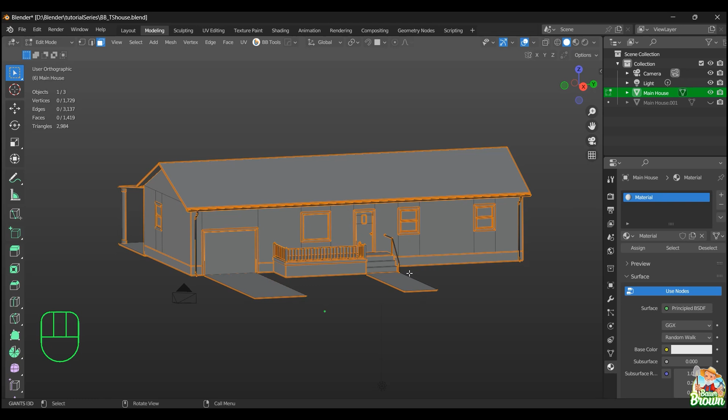When we start out here, we have one material. It's a very basic material, and it's a coverall. If we highlight the material and press select, you can see that the material encompasses the entire model, so every face has that material.

Now, what I like to do in the beginning is pick whichever material I think is going to be the biggest pain in the butt to work with. Maybe it's the siding or the roof, whichever has the most parts to it and seems like it's going to be the biggest pain to select every single part. That's what I will rename this base material to. In this case, I'm going to mark that as siding. This way, I don't have to reselect all of these pieces.

So I'll just start designating other faces to other materials, I'll show you what I mean. If I was to hit select now, it still shows every single piece. But what I'm going to do is click the plus sign for a new material, click new, and we'll name the next one roof. Now I'm not going to give any of these materials textures quite yet, I'm going to come back and do that when I'm done. But again, that's one of those things you can give it a texture right now if you want to, you don't have to wait. It's just the way that I do things.

Also, you can see that my siding came up as siding.001 and roof.001. That's because this is the second time I'm shooting this video, unfortunately. Same thing happened with the last video, it was delayed by several days, quite a while actually, because I shot the video like 3 different times for various reasons. Same thing this time, I had to reshoot for various reasons. Anyhow, that's neither here nor there.

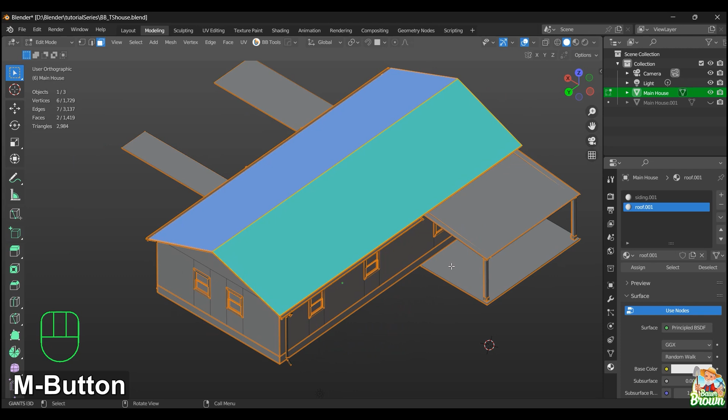So with this roof, what I'm going to do is just select the pieces of my roof that I want to have a certain material. Like this part of the roof here, I may want to have something like an asphalt shingle. But this roof over here I might want differently, so I'm going to select and highlight this roof and assign that. Now this roof over here, we'll start a new material, and I'm going to call that one porch roof because I'm going to do something a little bit different with that one. Maybe I'll give it like a corrugated steel or something, so it's not going to match what's going on with this roof, which is fine.

Now, with the way that I do my materials, I try to keep them to a minimum. There's 2 different ways we could be doing this. We could be using the base game textures and their texture atlases, in which case every one of these materials will be exported with the model, and when it ends up inside of Giants Editor, you'll be able to see every one of these materials. But since I'm putting this model into Substance Painter, I'm going to be deleting every one of these materials once I'm done. I know it seems very counterproductive, but it's just my process, the way that I do things.

The way that I do things is not the way to do them, I just want to get that out there. There's many different ways to get things done, and people do things different ways. This is just my workflow. It's not necessarily the wrong way or the right way, it's just my way.

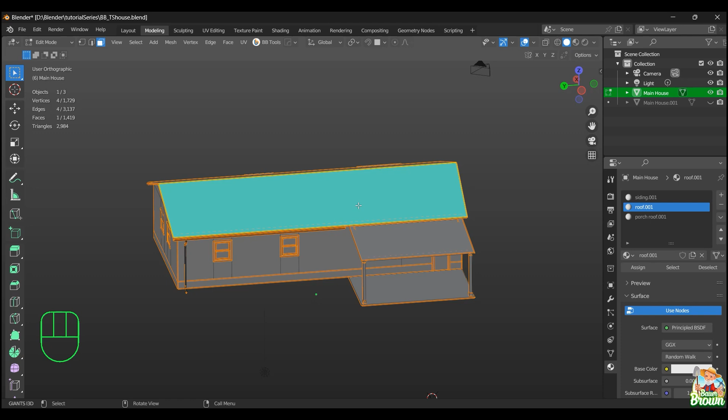I'm just not very good at it, so I hate messing around with it. So it just makes it easier for me if I try to keep everything within the 20 colors. Not a big deal if I go over, not a big deal if you go over either.

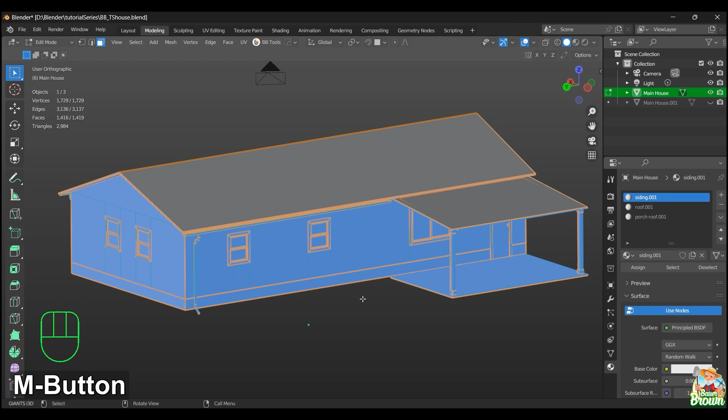So you can see what I have here now. When I select siding, you can see that the roof is not highlighted, and neither is the porch roof, because I assigned those to different materials. So that's what I meant about taking the most — whether it's your biggest area or just the more complicated area — that's what I rename that main material to.

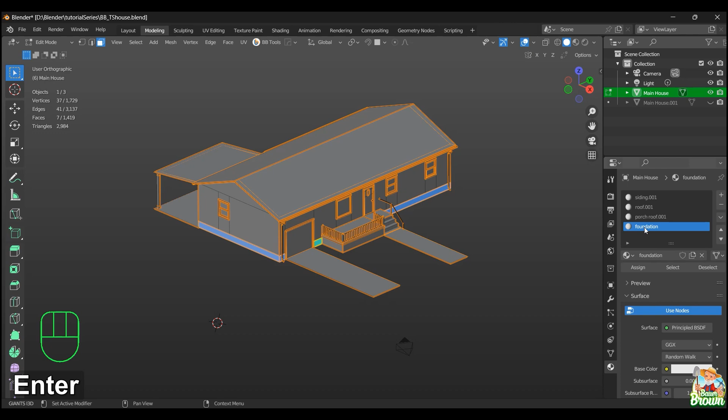And then from here you're just going to go to each one of these materials. Generally it's a material that you want to be a different texture. So if I know that this is going to be my foundation, I'll give that its own material. I'll start another one here and we'll call that one foundation, and then I'll assign that and just keep going right down the list.

So I'll go through the spouting, I know that's going to have a different material. Any of my trim work, that'll probably all be the same material. The insides of these windows here, like these pieces in here, that's going to be a different material. Doorknob will be a different material, the doors — so you get the idea, I don't need to explain all this to you.

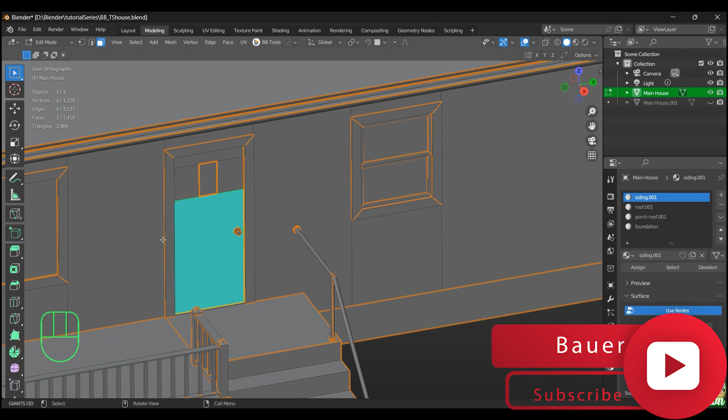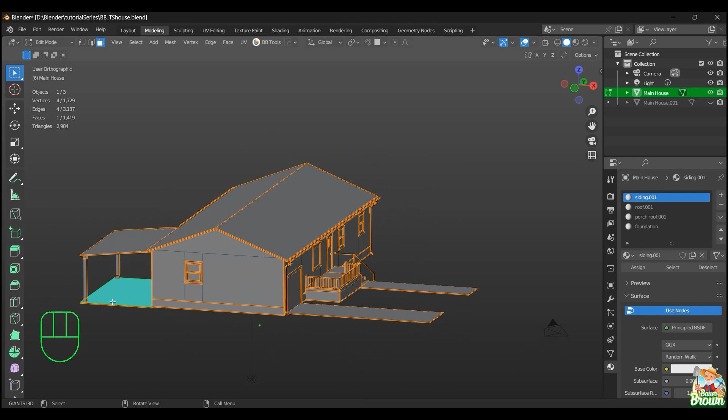Here and there, what you can do, and it's very helpful, is when we have things like the stairs, this walkway here, a driveway, a foundation, and a back patio — every one of those is going to be one type of concrete. Now it is helpful if you group them together, like maybe the stairs and the sidewalk is maybe the same material as this foundation, or the same as this back patio, so you don't have to have 4 or 5 different concretes going on.

But you can keep them separate if you want. If you have a vision in your head and a certain way that you think you want to do things, that's fine. But like I said, I try to keep it to a minimum if I can, but not a big deal if I don't.

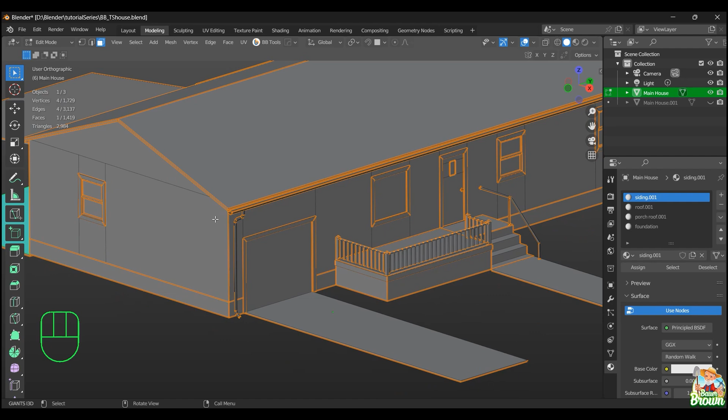So for the sake of trying to speed this video up and move things along, I'm not going to have you watch me go through every single one of these materials and assign them to a texture. What I'll do now is the next one I'll do, say, the trim work. But I will give you one pointer.

One of the ways that I find easiest when I assign these is if I go into X-ray mode. I find that much easier down the line in some instances, to be able to select my faces for these materials. But that's not the only way, that's just one way that I like to do it. There's also, you can press C on your keyboard.

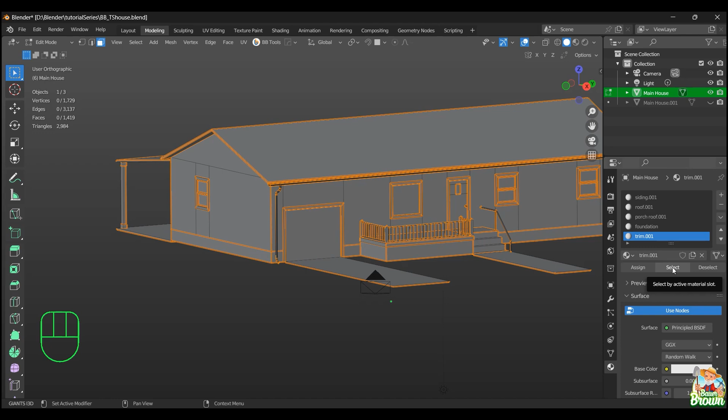Now, I think I just made the back patio part of my trim work. So when I hit trim and hit select, none of them are showing up. That garage should be showing up and it's not. No biggie, I'll redo that.

But anyhow, hitting C on your keyboard brings up that circle and you can start selecting things that way. This was all covered in my Blender tutorial series, like Blender for beginners, so you should be semi-familiar with the different ways you can pick faces.

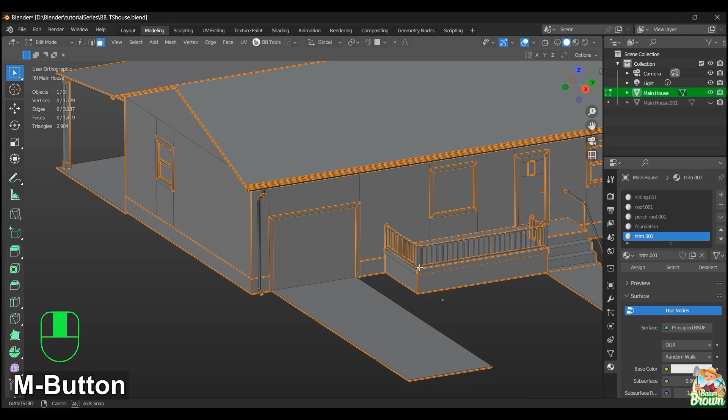So what I'm going to do is jump ahead and go through and make a different material for all of my different textures. I want you guys to do the same. Just for now, make the material and assign it to a face, don't worry about textures or anything like that. When I get back with you guys, I'll have all of my materials created and then we'll go through and create the texture that's going to go on here, and then we'll take it from there.

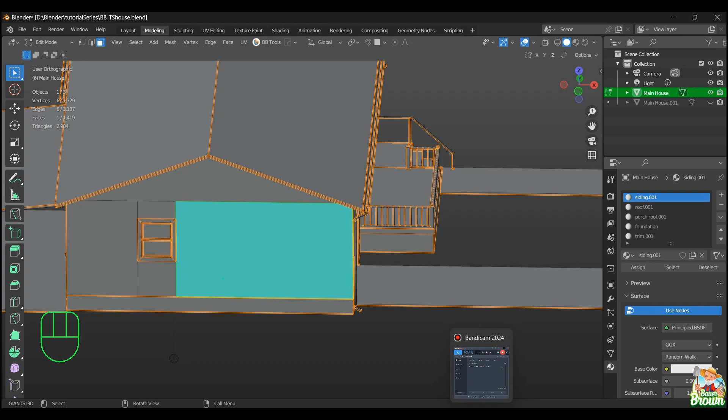Okay, so I'll see you guys in just a little bit, and by that time we should both have all of our materials created.

Two hours later. Alright, I am back and I finished my list, I have all of my materials created. How did you guys make out? You should have a list that looks something like what I have here, every one of my materials.

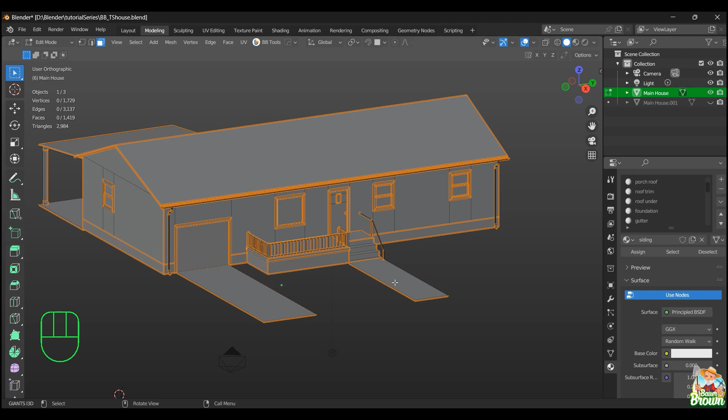Now, a good way to go about refining your materials - what I mean by that is we'll start with this top material here, the siding, because that encompassed everything.

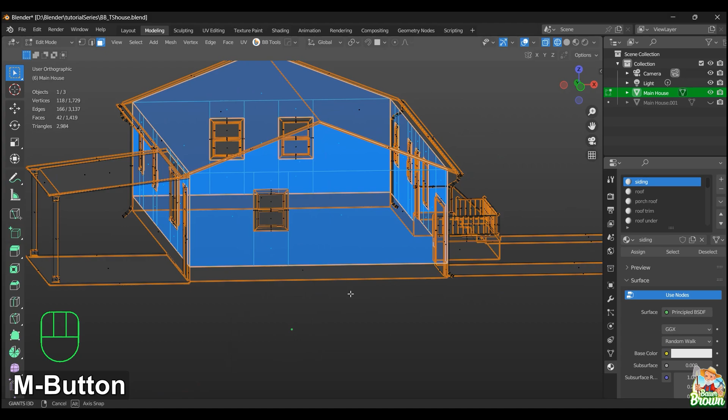What I'll do is go into wireframe mode, my X-ray mode - I just noticed I always call it X-ray mode, wireframe mode - and then hit select. So here you can see that just my siding is selected, which is what I want, but it's inevitable that you're going to miss pieces.

So maybe it's part of the window trim, maybe you'll see part of the foundation, doorknob, something - you're going to see something that highlights along with the siding, and you don't want that to be the siding. So that's the way to go through and spot the pieces that you missed that belong to something else.

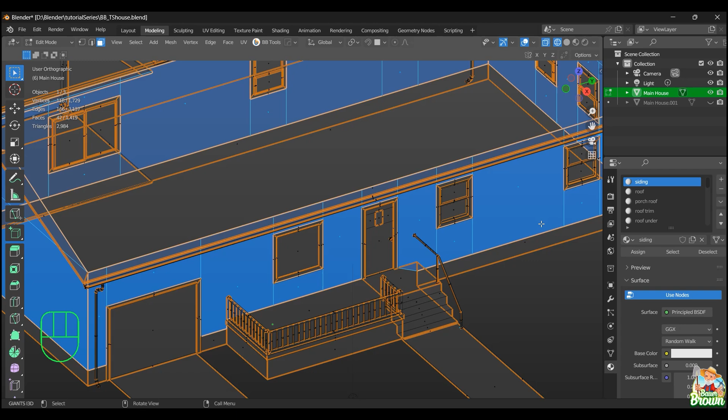So maybe part of the porch, part of the railing, rain spout, you get the idea. So that's the other benefit of using that main material that included everything, because this way, when you miss something, you'll be able to spot it very easily - your siding will highlight as well as all of the other pieces that you missed. It makes it easier to go back, spot those pieces, and assign them to the materials where they belong.

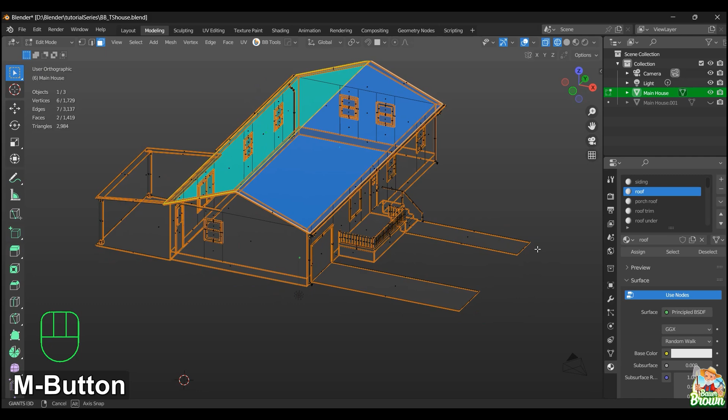From there, what I'll do is click off of it, click my next one, roof, and make sure just my roof is highlighted. I'll do this for each one of the textures, going down through every one of them.

We got the porch roof, okay. Roof trim is just the roof trim, no problems there. Roof under, which should be just the bottom sides of my roof - we'll select that, yep, and that is just the bottom sides. I'll do this for every one of them - foundation. So you guys should do the same.

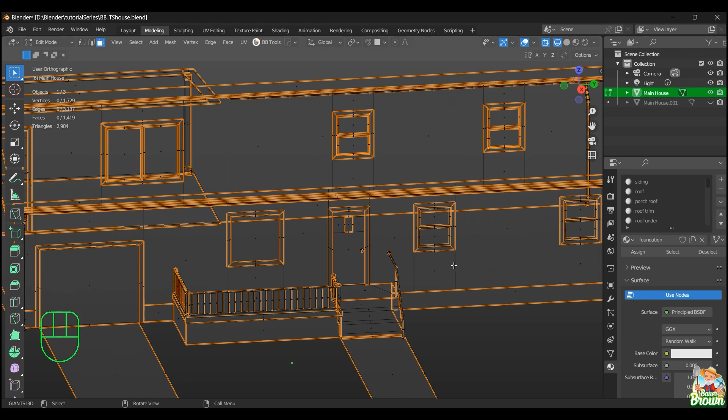Go through and make sure that you didn't miss anything, because it's not a big deal - it can be corrected in Instamat and Substance Painter without much of an issue. But it just makes life a lot easier on yourself when you get into Substance Painter and find out that maybe your rain spout has a brick texture. So it can be corrected, but it's easier to just avoid that and have everything nice and clean inside Blender before we even export it out to Substance Painter.

So from here, once you got that done, you got everything cleaned up, every face, every material is assigned to the right objects - so every material is assigned to the proper faces - we can go through and start giving these a texture. Now, like I said, they're going to get the same texture.

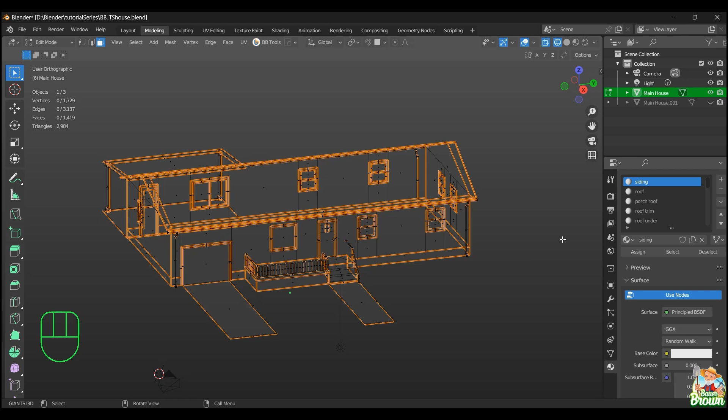So don't get too carried away here. What we'll do is go down to where it says base color. We're going to click on that, click image texture, and click new.

Now with new, I'll click up here on width, click, hold it in, drag it down, and hit 2048, because I'm going to use a 2K texture. If you did a different type of house, maybe something smaller like a shed, or something huge like a mansion, you might want to go smaller or larger with your texture depending on what you have in mind. But this house here is perfect for a 2K.

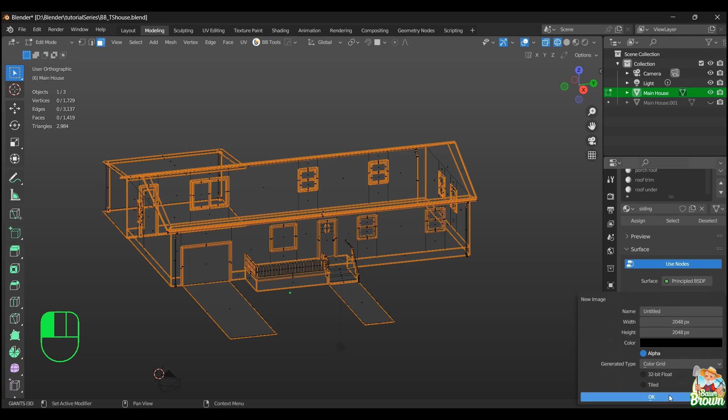So that's what I'm going to go with. And then for generated type here, I'm going to go with color grid - I'm sorry, not UV grid, UV grid is the black and white textures, the color grid is what I want. So I'm going to select that and hit OK.

So now that just assigns that to my roof - let me get this up here really quick - or to my siding, I'm sorry. So now when I go into material preview, you can see my siding is now that color grid. Now what I'll do for the next texture is go to the roof, hit base color, image texture.

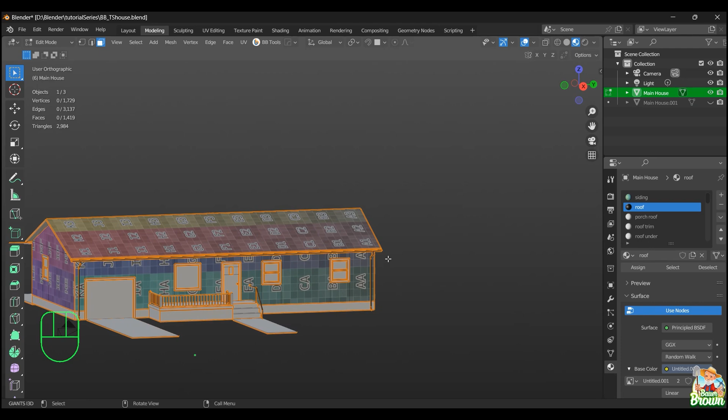Instead of repeating that process, I'm just going to go to this image here, drag that open, and pick untitled. So I'm basically giving it the exact same texture as the one before it. This is what I meant earlier when I said every one of these materials gets the same texture, all of them.

And what I'm going to do from here, once these are all assigned, is start realigning my UVs - my textures. I'll show you what I mean by that when we get there.

So if you're following along, what I want you to do now is just keep going through your list like I'm doing here. Go to image texture, untitled. It's really easy. I mean, it's repetitive, but it's easy. So you'll get a pretty good feel for what you need to do here.

Like I said, it's just a preference that I do it this way. There's no specific reason that I'm doing this at the end. This could be done as you go along. It's just the way that I end up doing it. Most of the time the reason for it is, as I'm working, it's different compared to when I'm working on my own than when I'm making a video.

So when I'm making a video, things are going slower. I'm explaining things, so it's a lot easier to just assign these things as I go. But when I'm working on my own, I'm cruising right along. Things are coming together pretty fast, much faster than when I was first learning.

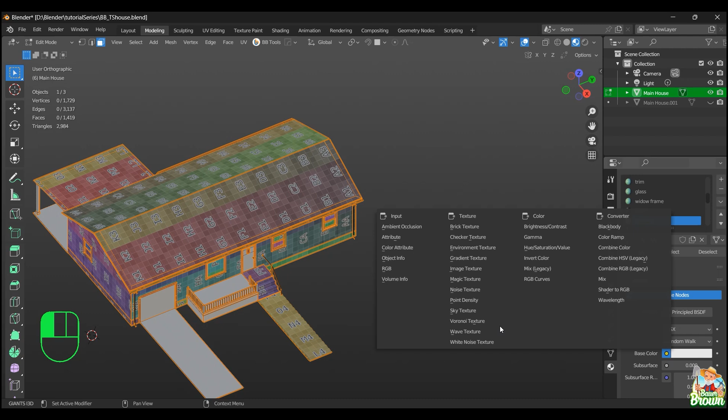But now things cruise right along, and it just slows me down having to stop, assign a texture to it, and keep moving along. I'd rather just wait until I got to the end and then cruise through the same way I'm doing now and just reassign everything to a texture.

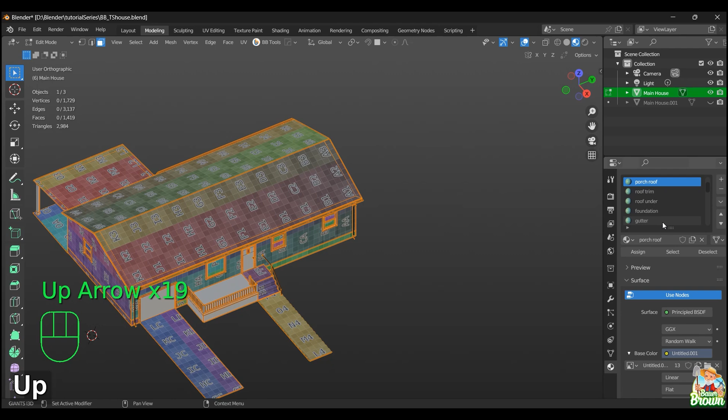Now I haven't counted my textures. I guess I can do that really quick and see what I came up with here. Let's see what we got. There's 1, 2, 3, 4, 5, 6, 7, 8, 9, 10, 11, 12, 13, 14, 15, 16, 17, 18, 19, 20, 21, 22. So I got 22 textures.

I went over the 20 that I initially had in mind. So what I can do now is either go back and combine two textures, or I'm just going to have to squeeze in two extra vertex colors, which is probably what I'll end up doing - I'll put an extra two colors in there. Not the end of the world, not difficult.

For some reason I'm just not good at vertex coloring. I tried getting into it using different applications, using just the Blender default, and yeah, I don't know. It's not complicated, I just wasn't really grasping it the way, maybe as quickly as I wanted to, or as well as I wanted to.

I found the add-on with TexTools ended up being really nice, it worked out well for me, so I stick with it because it works well with TexTools. Wait, is it TexTools? I got that wrong, didn't I? Let me check my UV here. Oh no, it is TexTools. Didn't sound right for some reason when I was saying it, I thought maybe I had it wrong.

All right, so let's go to railing here. I'll quickly finish these up and then show you what we're going to do next. The next step is going to take a little bit, not crazy complicated, but like everything else, it's monotonous and there's a bit to it. So we'll just finish adding these.

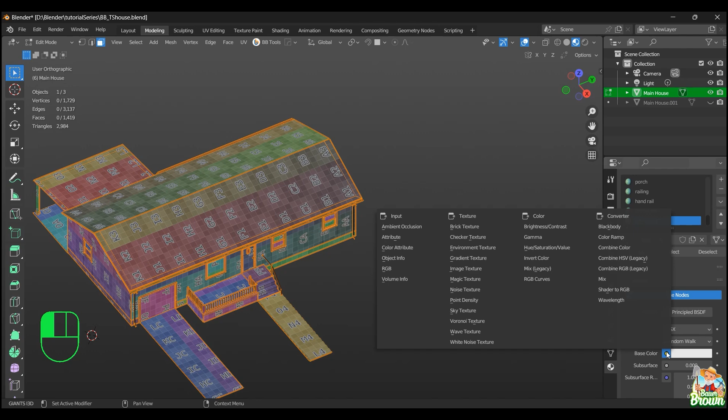All right, image texture, untitled, and then the last one. All right, image texture, untitled.

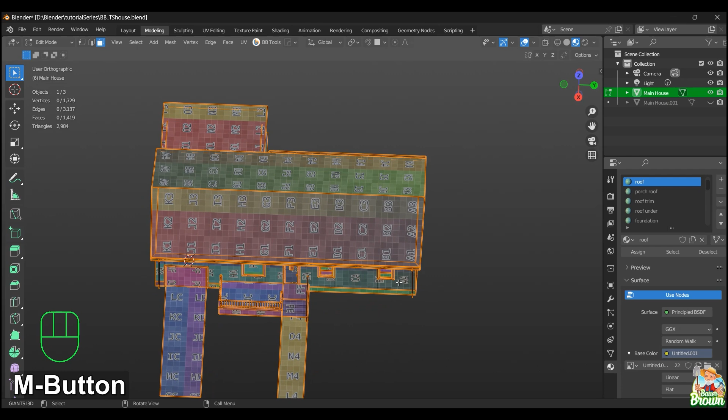Now the reason I use this color grid is you can see here how on my roof this one's kind of turned to the side, and I don't really want that. I want all of my textures oriented the same way. So when I put roof tiles or shingles on here, those shingles would go from side to side instead of top to bottom. Well, I don't want that, I want them to go from top to bottom.

So what I'll do is get into my UV editing space here. I'll make this a little bit smaller—really doesn't matter. I'm going to select this here, and hovering over top of my UV space, I'll get my keypad, hit R for rotate, and then -90.

You'll get used to like -90. If you're spinning to the right on this side, if you want to go like this one, I had to spin to the left. So if I go Control Z—oh no, I would want to spin to the right. To me, that would be 90 degrees, but if you look over here, it's actually -90 degrees. You'll get used to it after a while. So it's R -90.

So this way now, when my tiles show up, they're going to show up correctly. Again, this is one of those things that could be corrected inside of Substance Painter, but it's a real pain if you have to correct too many of these. One or two you missed isn't a big deal, but too many is a major pain.

All right, so this one needs to spin to the right, and that would be negative. So we'll hover over top of our UV space, R -90, and there we go. Okay, so those two are situated, and I'm going to do this for literally every one of them. Now with this in mind, with rotating everything, you're going to have a pretty fair idea of what your texture looks like. For the most part, it's not vitally important as long as all of your textures point in the same direction.

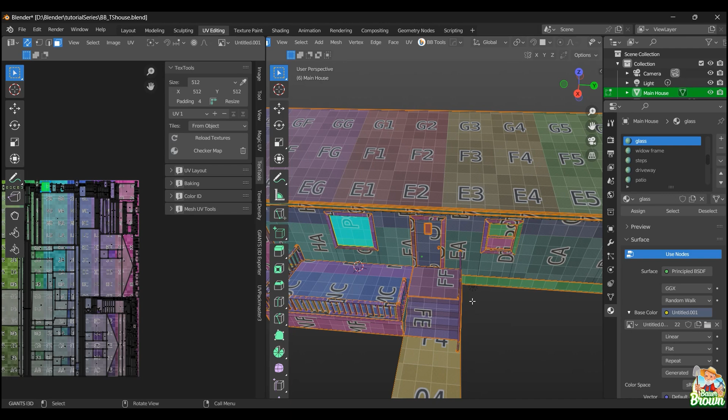The only thing I don't worry about is my glass, because there's no design or pattern to it, it's just a blackish or grayish color. So there's no shingles, no brick texture, no wood grain or anything like that, that's not going to look right.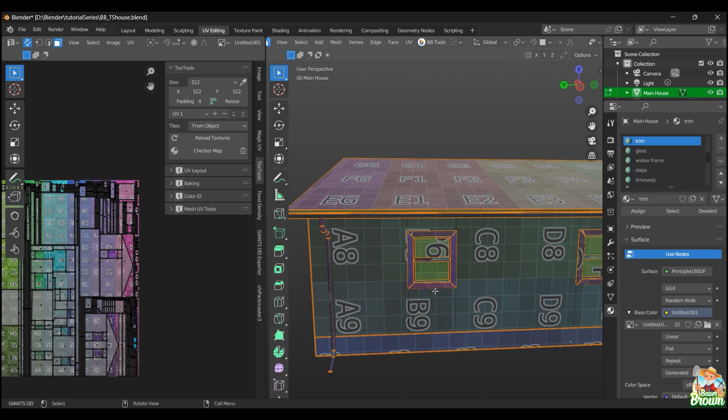I'll do this for each one of these, making sure they're all pointing in the same direction. As long as they're pointing in the same direction, you're good to go. You'll know right away when you get into Substance Painter that you missed something, because your wood grains will look pretty good except for that one that stands out because it's pointing in a different direction.

So I go through each one of these. We'll go through the siding, and the siding is definitely important. It doesn't matter if it's pointing up or down or side to side, as long as they're all in the same direction. I try to keep them up and down, because if you look at the textures, that's usually the way the texture goes, you're not looking at it from the side.

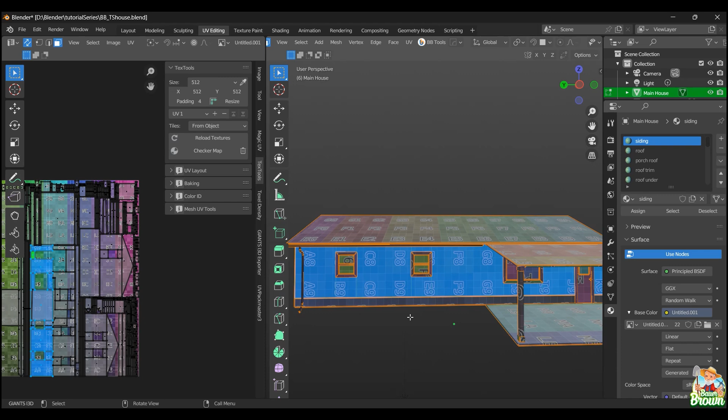Now if I were to keep all of these on their side, say it doesn't matter as long as they're pointing in the same direction, what I would have to do inside Substance Painter is rotate all of my textures 90 degrees. Like that particular texture, when applied, my boards would be going up and down, and I don't want that. So I would just have to rotate that entire texture 90 degrees, and then it would look right again.

You can see over here, looking in my UV space, there's the cutout for the doorway. Here you can tell it needs to spin 90 degrees, and over here it would have to spin to the left, which I would consider negative 90. Maybe it's just me, it's what I have in my head.

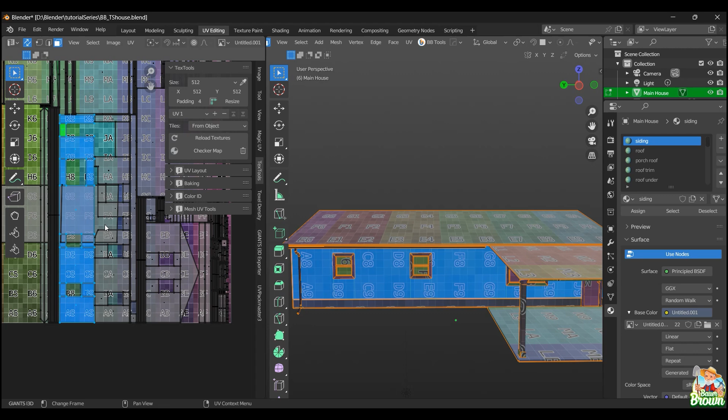But anyhow, we'll rotate, hit R, 90 degrees, and then we'll do the same thing for here, get these all pointed in the same direction. Trust me, this is going to make life so much easier when it comes to texturing inside. Oops, all right, so I goofed that one up, and I do that a lot, I'll goof it up and send it in the wrong direction.

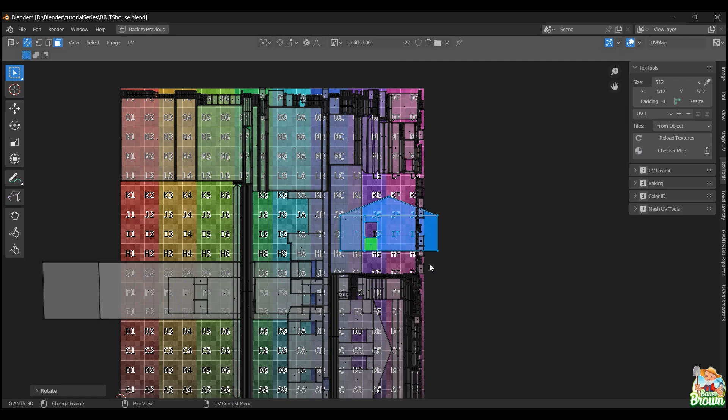Now what you need to not worry about right now is in your UV space, you can see that you have things overlapping, they don't look as good as they did before. So you're going to make a bit of a mess out of this as you go. Don't worry about that, we're going to pack our UV mesh, and I'll explain again when we get there what UV packing is. It's basically just going to reorganize our mesh for us and get it looking really nice.

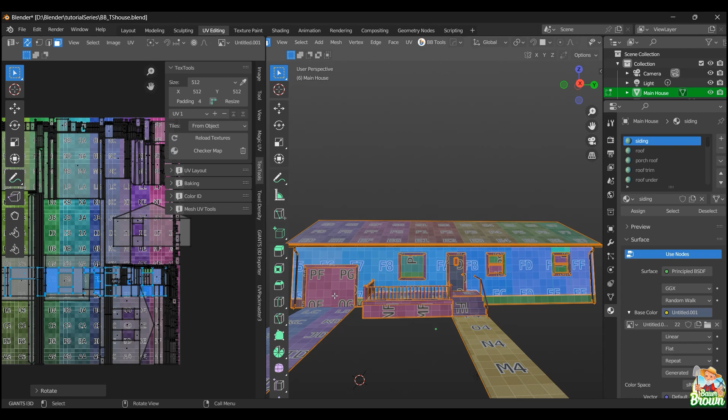There's a way to do it, there's an add-on that I use, UV Packmaster, which costs a couple bucks. So that may or may not be something you're interested in. You may have to look into other add-ons, or just use the default Blender application, Blender has a way to do this by default.

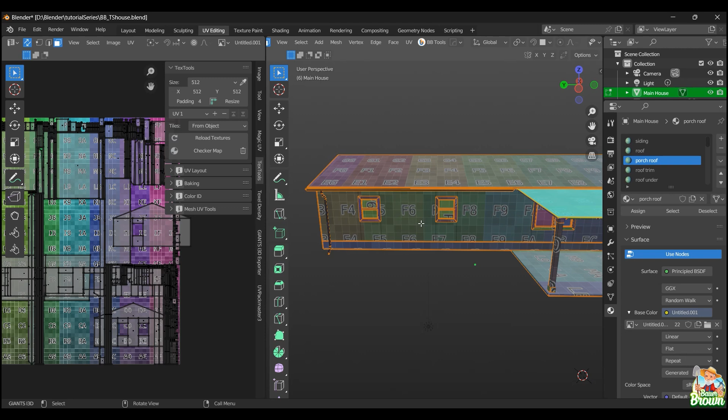Negative 90. All right, so I'm going to leave you guys to it, just do the same thing. Go through, realign every one of your textures to the way that you want them to face. Pay particular attention to areas that have a definite pattern to them, like your roof shingles, or your siding, especially if it's going to be brick or regular vinyl siding. It's important that it all goes in the same direction.

Window trim, same thing. So basically anything with a pattern to it, it doesn't matter what it is, if it's wood grain or a brick texture, just try to keep everything in the same direction.

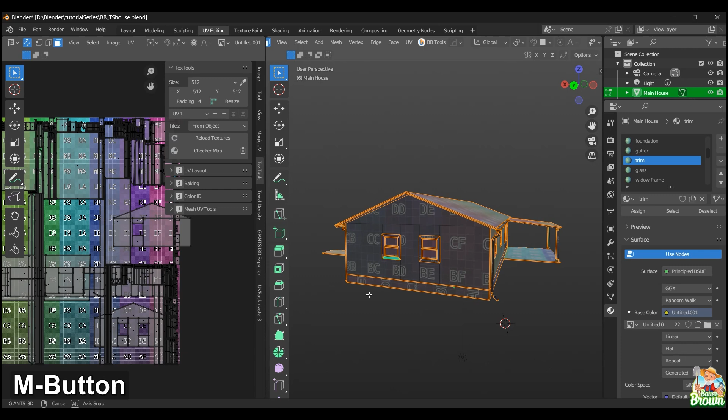So like I said, it takes a little bit to go through and check every one of them. Sometimes I'll either miss something or get lazy and say, so far they've all been good, so all of them are probably good. And that's where you get burned. You get inside of Substance Painter and realize, shoot, not every one of them were good. Yeah, so it is what it is.

But like I said, I'll check these, I'll check the railings here, and I'll make sure that all of these are pointed in the same direction. All right, and so far they are. It looks like it put just about everything vertically.

All right, so I'm going to leave you guys to it again. Like I said, some of you guys may be following along, so take the time, go through your model and select every one of these.

Now what's going to happen, and what I said about making sure you go through with your seams and stuff like that, to make sure everything is correct as far as that goes, is as you're going through your model, you might come across something like, oh shoot, I missed that. So what'll happen is when you correct it and add a seam, since you're in live unwrap...

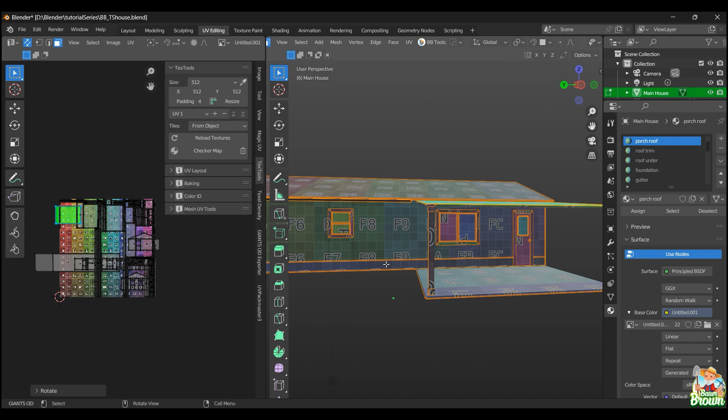it's going to re-unwrap everything. So everything that you just oriented, everything you just rotated and pointed into the right direction, is going to unwrap all over again. So you're going to have to go through and do it all over again.

So one thing you could do at this point, if you wanted to, is go up here to your sync selection, turn that off, and then turn off your UV live unwrap. What that'll do is ensure that if you missed anything and have to add a seam, it's not going to re-unwrap everything. But that's not really fixing anything either, because if you miss something, you want to unwrap it again, right?

It depends on what the piece is, so you're going to have to use your own judgment on that. Like say, for example, if I miss something on this window, there should definitely be a seam there, then I know it's throwing off my UV space and it needs to get fixed.

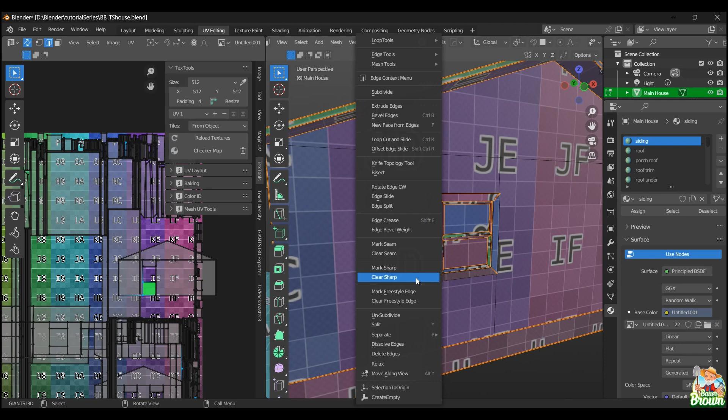So you can see right now, if I was to take this line right here and mark that as a seam, you can see what just happened there. My roof, everything is all out of whack again. Everything just went all crazy and nutty, and I have to go back to every one of those.

And that's usually the way it works, right? It's usually at the very end when you're just about finished rotating all of your faces or your UVs, that's when you find the piece that you missed, and you have to do it all over again. Trust me, I've done this several times on some models. And it's like with anything else, the more that you do it, the easier it's going to get, the better you're going to get at it, and you'll miss less and less as time goes on.

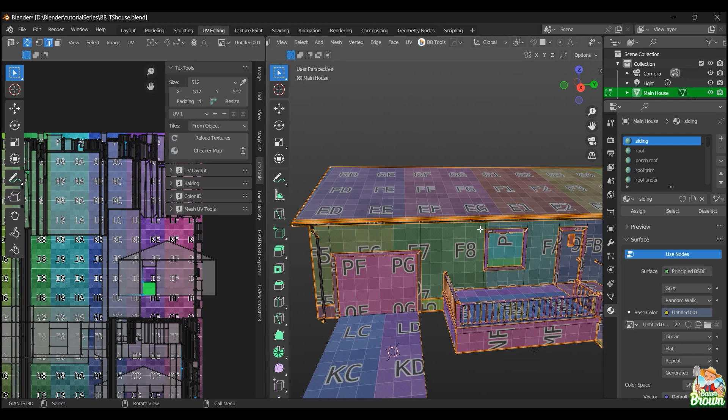And then other times I won't notice it until I get inside of Substance Painter when I go to apply a texture to something and it just looks terrible, and there's no easy way to fix it unless I go back into Blender and redo all of my faces again for the umpteenth time.

So that's why I said, if you're texturing outside of the base game textures, not using the texture atlases or any of the base game textures, but using Instamat or Substance Painter, this is what I've been saying all this time about being very particular with your models. Things need to be done well, everything needs to be marked well, it needs to be unwrapped well, the whole 9 yards.

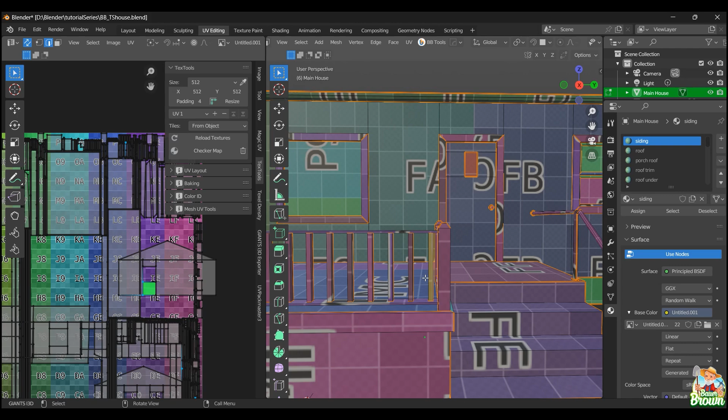And that includes orienting your faces.

I'm not sure how many of you are familiar with Substance Painter. That seems to be one of those applications with a price tag involved, so a lot of people may want to stick with the free option, like Instamat. Trust me, I don't blame you one bit. It's exactly the way I started out. Until I knew this is something I really wanted to do, I didn't sink money into those programs. I used what was available to me.

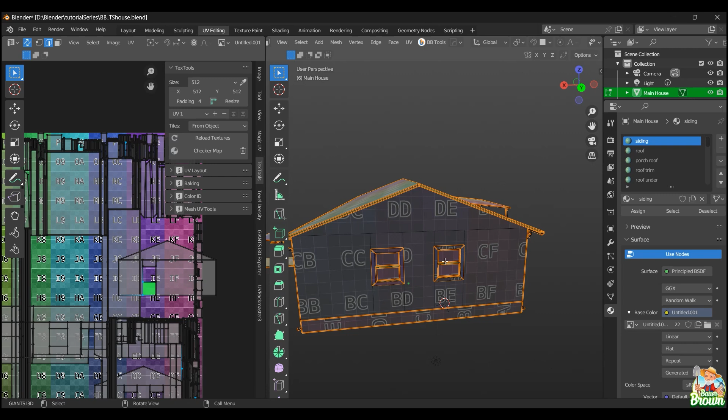So you may not be working with Substance Painter at all. I wish I could be more help with Instamat, but at this point I don't know enough about it, I haven't used it enough to be of much help. Hopefully down the road I'll teach myself and get better at Instamat, and then maybe we can do some basic tutorials or go over some things as far as that's concerned. Because I feel like it's kind of a letdown when you follow a whole tutorial, things are coming along nicely, you're learning a lot, and then you finally get to a point where the guy is using Substance Painter and you just don't have that. That sort of stinks.

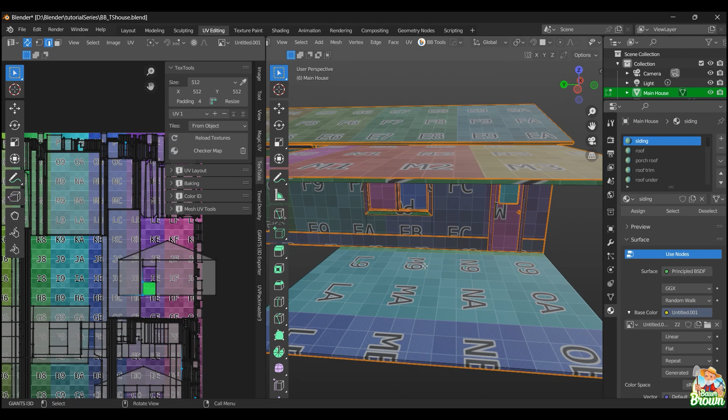Now, if Substance Painter is something you're thinking about, and I've mentioned this in the past, you don't have to go strictly through Adobe and get onto their subscription plan, because I'm not a big fan of it. It does have its perks though. Subscribing, I get bunches of free materials, probably a couple hundred right now that I could just go grab. So if I need a brick or a cobblestone or some kind of roof shingle, I don't have to pay for it, I can find quality textures I can use for free.

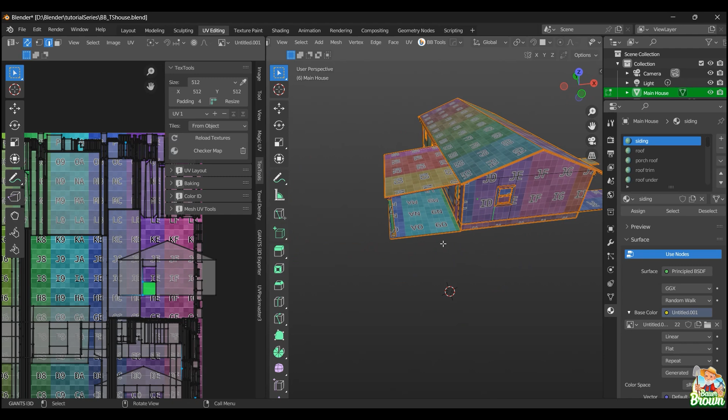And then the other thing is it does make it affordable. The package I have with Adobe, I actually have two packages because they kind of break it up on you. They have one that they say includes everything - it includes Photoshop and all your basic Adobe applications. But then they split it up on the 3D side. The all-inclusive subscription plan does not include your 3D apps, that's another plan. So right now I'm paying for two different plans, the 3D side and the Photoshop side, so it adds up.

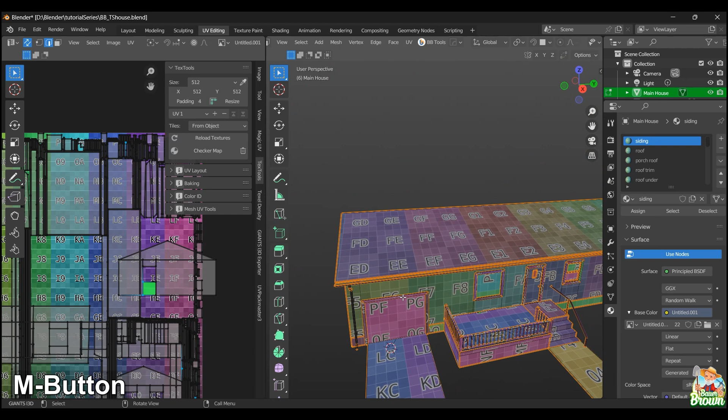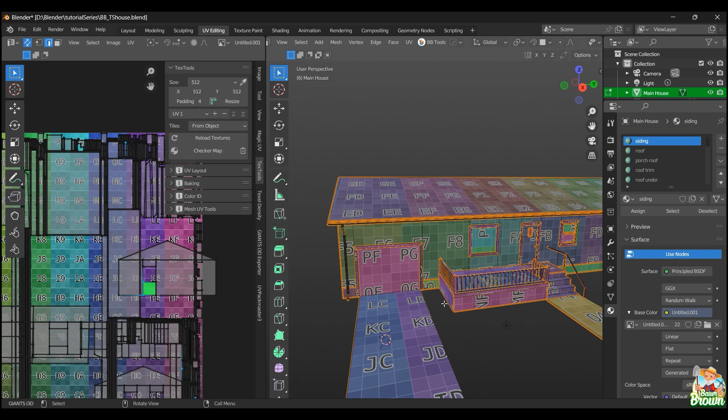So you don't have to go down that road. You can go on Steam and search for Substance Painter and pay one price for it, like $100 and some, however much it costs. Now the only difference is you're locked into that version, so you won't be updating to the next version. When Adobe comes out with the next version of Substance Painter, you're stuck where you're at unless you pay the upgrade fee, which is fine because you really only... you don't really have much use for the latest and greatest. As long as it does what you wanted to do, you should be able to use that version of Substance Painter for an awfully long time before you feel the need to update.

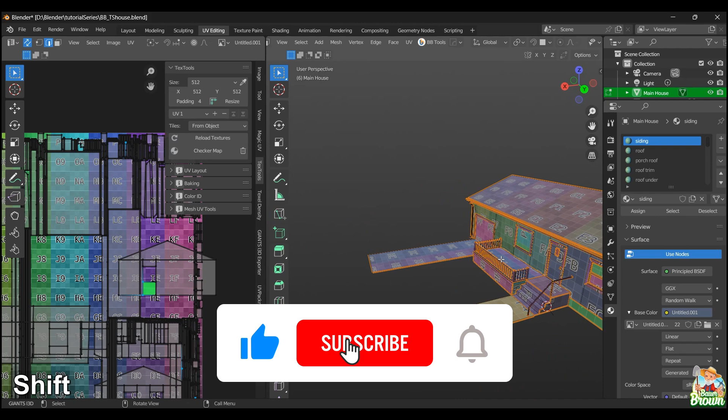Now, the other thing I meant to mention about the subscription plan is how it makes it affordable. Basically I have every Adobe application, and if I was to pay cash for all of those, forget it. Back in the day, Adobe full price for, say, Photoshop, they wanted anywhere from $900 to $1,000 for that thing, so it's expensive. If you put a price tag on each one of those applications, I could never afford that out of pocket, so it does make it affordable. It does have its benefits, even though I'm not a fan of the subscription model, not by any means. It's not all bad.

So anyhow, like I said, if you're following along, go through and orient all of your faces to the direction, or your UVs to the direction where you want them.

Make sure you're doing the rotation over here, that you have your mouse over top of the UV side and not over this side, because if I highlight one of these faces and then rotate it 90 degrees, you can see what happened there. So no bueno, it doesn't look good. Make sure you're over top of the UV side when you do that.

Take some time, go through, get your model just the way that you need it, or your face is pointed in the right direction. And that's it. I'll meet up with you guys in just a little bit. I'm going to do the same thing over here, and we'll move on to the next step.

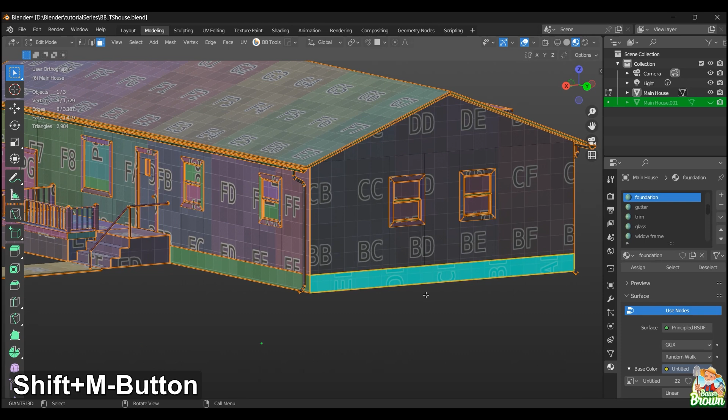Alrighty, I am finished up. How did you guys make out? Did you make out okay? You have everything oriented correctly, rotated all of your UVs that you needed to get everything looking nice, sort of like what I have here. You will notice that I do have some of my UVs, like this one, facing to the side, as compared to these that are right side up.

For me, if you look at my UV mesh here, when I select one of these, it's vertical, going up and down. They all are. So what matters to me the most on these foundation pieces is that they're at least all facing in the same direction. Now, I could spin them if I wanted to, and I may end up doing that depending on how things shake out when we pack our mesh, which is going to be our next step.

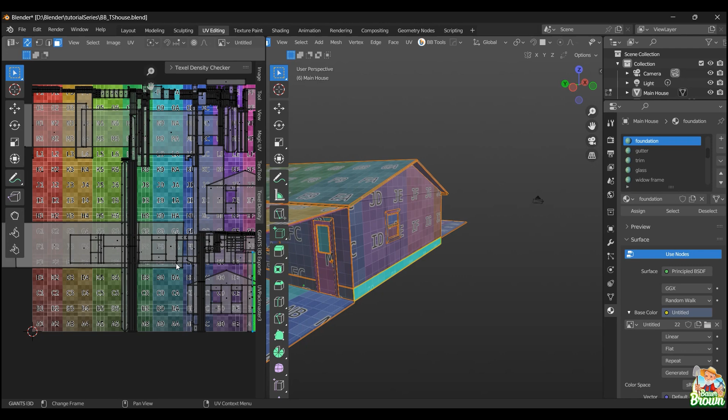It's called mesh packing. So if you look at what we have going on with our mesh here now, everything is kind of a mess, right? Before it was semi-organized, and now it's not. We rotated things and they're overlapping and just not looking as good as they did before. So we're going to pack it, get everything nice and neat once again, and then we can move on to the next step.

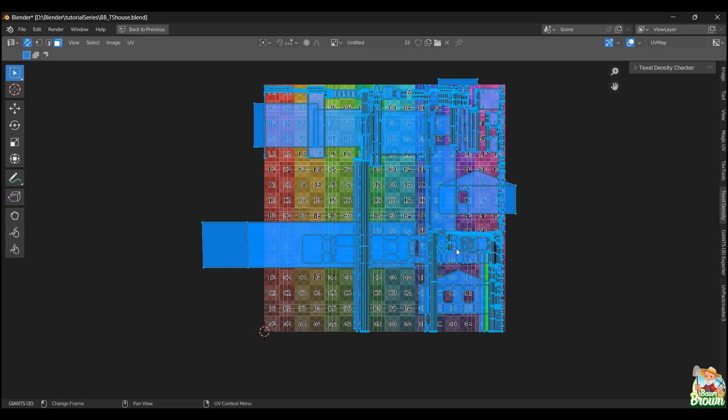Now, Blender does have a few applications or add-ons, or functionality, however you want to call it, that allows you to pack the mesh. We'll get into that. I'll show you the ones that are native to Blender.

Now, I do use a paid add-on. I use something called UV Packmaster, and I'll have to check the website, but I'll make sure I leave a link for you guys in the description. As far as I can remember, I think they're up to UV Packmaster 3, and it's not too cheap, I want to say it's like the $30-$40 range, somewhere in there. So that may not be something that's up your alley, that little bit of a price tag. But it's not necessary, so don't feel like you're not going to get the job done as well because you don't have this paid version that costs X amount of dollars.

UV Packmaster, which you can see here, has a lot of bells and whistles, a ton of stuff. Honestly, it's overkill for what I do, it has more options than what I really need. Now, if you're getting into character creation or sculpting, something like that, this is going to come in really, really handy. I bought it just mostly to play around with, and you never know where this crazy road is going to take me, where I'm going to end up in my Blender adventure. I bought it just for that reason, but it's completely unnecessary. UV Packmaster maybe does a slightly better job, but everything that Blender does natively by default is just fine, it's not a problem. So you'll be okay without it.

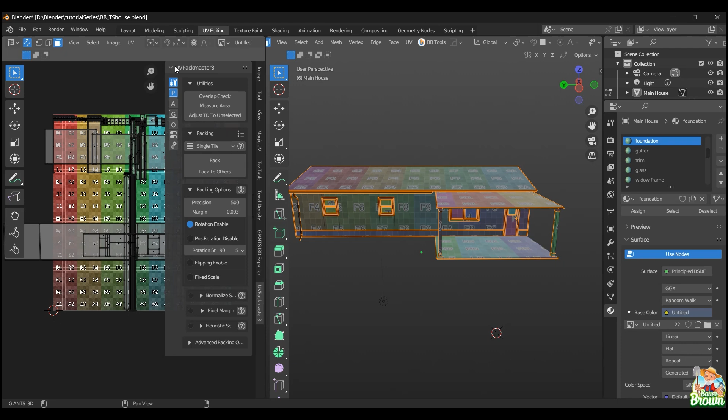Now, one thing you could do at this step right here before we get to packing, it all depends. Your mesh, or your textures, should be relatively the same resolution. What I mean by that is if you look at the roof here, you'll see like the F6, F7 lettering. If it's really big on your roof and say really small elsewhere, they look different sizes, basically, is what I'm getting at.

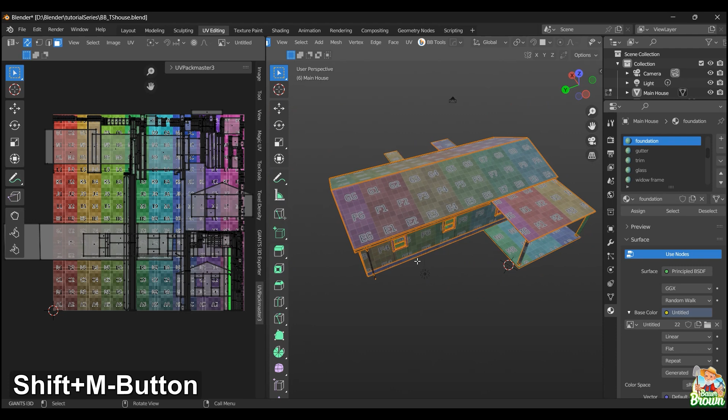If these textures look like they're all different sizes, somehow your resolution is off. They shouldn't. It should all look pretty much like what we have here. They should all be the same size.

If for some reason they're not, you can straighten that out with the texel density add-on. I went over this in a previous video, so hopefully you guys are at least somewhat familiar with texel density and how to get that straightened out and get everything looking nice again. You get everything the same size, basically.

So you could use that, or you could readjust using texel density, right? If you want to make better use of your space to try to squeeze a little more resolution out of it, you could use the texel density checker for that as well. I'll leave that up to you guys to research, to either go back and watch the previous video that has the texel density checker included, or to just look on the website or do a quick YouTube search or something like that.

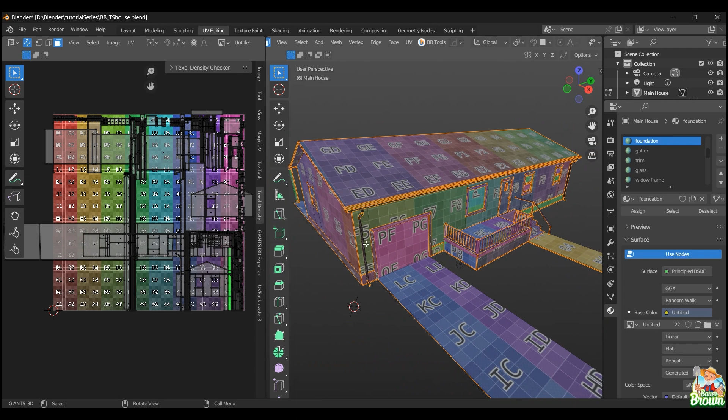My guess is that you probably shouldn't need it. I can't think of a time where I really had to come in here after getting my textures, these color grids, after getting them put in place, that I needed to come back with the texel density and straighten things out.

It looks pretty good the way it is. Everything looks okay. All right, so getting into UV packing. All we're going to do is straighten out this mesh and get it to look really nice.

Now, the one thing that's important is we don't want to rotate anything anymore. We have everything rotated where we want it. We don't want anything to spin out of place. I don't know if I worded that quite correctly, but we don't want to rotate it anymore.

So if we go up to UV, we have pack islands, right? So they have something called pack islands. Now, the one thing you want to take note of is we have scale and rotate. Rotate, we want to uncheck.

Because what that'll do on its own is rotate all of your UVs to make the best use of the space. So if it feels like this part of the house needs to get spun 90 degrees to be able to fit into the UV space the best, that's what it's going to do. And we don't necessarily want to do that.

Now, under extreme circumstances, if you're trying to make the absolute best possible use of your space, we would let it rotate, and we would just straighten that out in another program like Instamat or Substance Painter. But we're not going to do that. It's only a house. It's not that vitally important. So make sure rotate is off.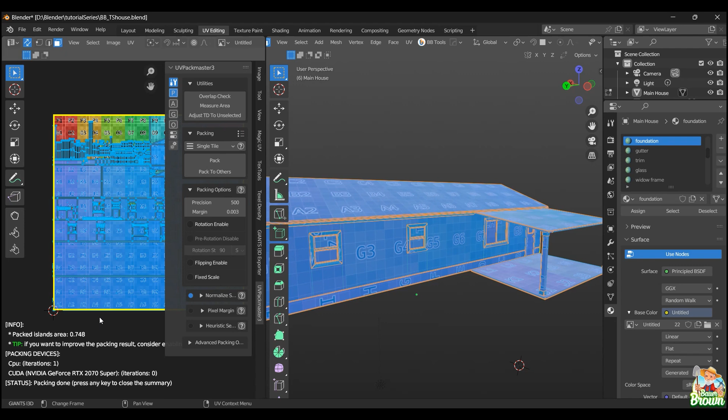And then from there, we just pack, and that's it. You can see it all basically did the same thing. Now with UV Packmaster and the rest of them, it will leave some space up here at the top of your mesh.

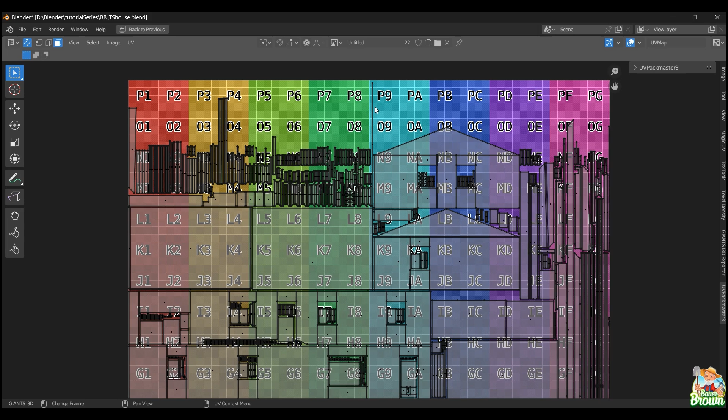What's going on there is I have one or two longer pieces. So what I could do is check these longer pieces, like these over here, or maybe this piece here. I can see what they are first—if I can highlight that again. There we go. So I can go into my main mesh and figure out exactly what that is.

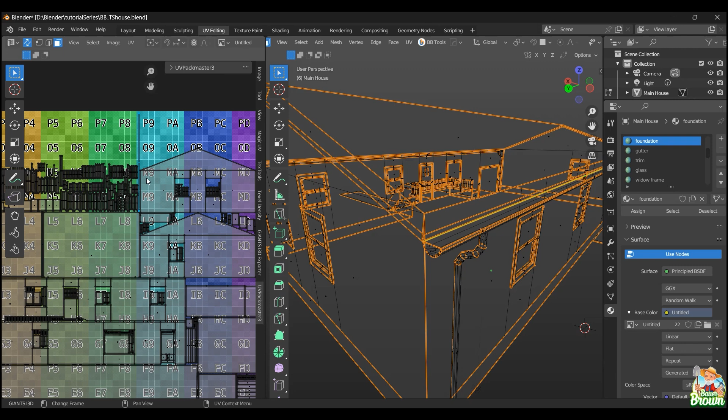It looks like it's part of a rain spout. So this is what I was talking about earlier—that I may still end up rotating some things depending on how it looks inside my UV space once everything is packed. If I spin that 90 degrees, that'll clear up some more room, because right now it's standing vertically and taking up that extra room.

I could spin that on its side, as well as these pieces over here—I'm not sure what that is, looks like part of the roof trim. So I can spin those and that'll help clear up a little room. But I'm not going to be so anal about this one—I'll just leave things the way they are, and I think we'll be just fine.

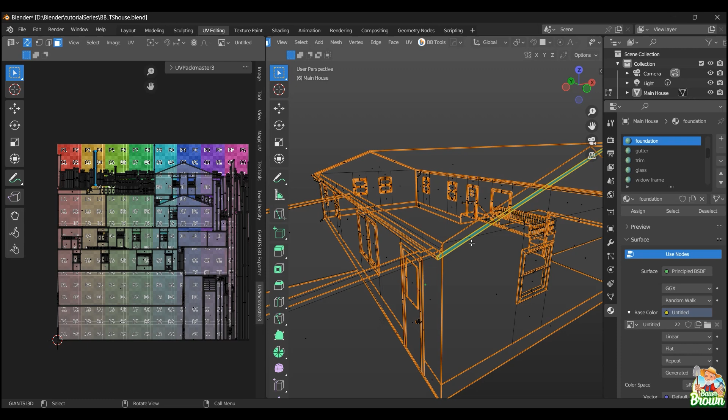So that's all you're really looking to do—just pack your mesh, and be aware of your islands. I think I mentioned in one of my last videos what the islands were: they're basically everything that you unwrapped. This piece here is an island, and the next piece you unwrap is another island. The margin is the distance between these islands—that's as close as you want to let them get, 0.003.

Now, if you want to select entire islands—I think that's what I couldn't remember in one of the videos, I think I was pushing P or something—it's actually L. If you hover over top of an island and press the letter L, it will select the entire island for you. So if you're working on something where you need all the pieces for that island, just press L.

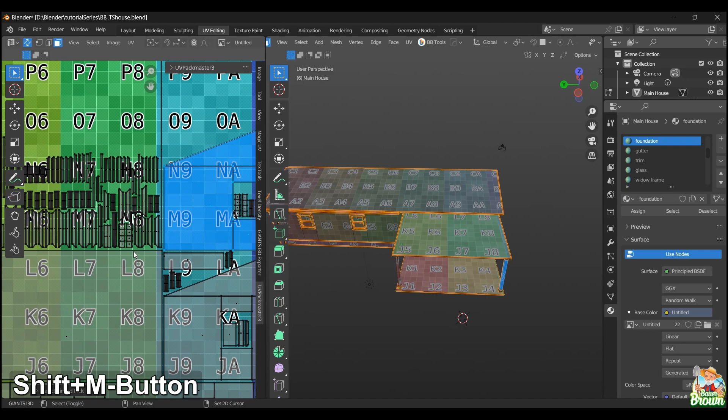I'm not sure if I mentioned it in the previous video, but there are also ways that you can straighten out your UVs. I think I did go over that, but maybe didn't show you how to do it. I'm not really good at it, so I can't quite remember everything it entails to straighten one out, and I don't really have anything here that needs straightening to show you.

This would all be part of the process of organizing your mesh, going through and looking for pieces that maybe aren't quite right. This here is something that could probably be straightened. Now, like I said, I'm not good at it, so let's see if I can do it quickly without wasting too much time. Let's right click on it.

Yeah, I'm not sure, I think there's one that says select. I know it's not straighten. Yeah, that's not straighten either. I don't want to waste too much time because I can't remember exactly how to do it. It's been a while, I rarely use this function, which is why I can't remember, but it does come in handy. It's something you'll want to look up. If you're interested, do some Googling, like how to straighten a UV, and you'll find something that shows you how to do it.

All right, let me have a quick look. What you would do is select one piece that's fairly straight to begin with, and once that's selected... I'm just looking quickly to see if I missed something. Once selected, I think you right click and hit straighten. I'm not sure if it's that option or something else you should be clicking, but what it does is take all three pieces and stand them up vertically in a straight line, so it doesn't have this shape to it anymore.

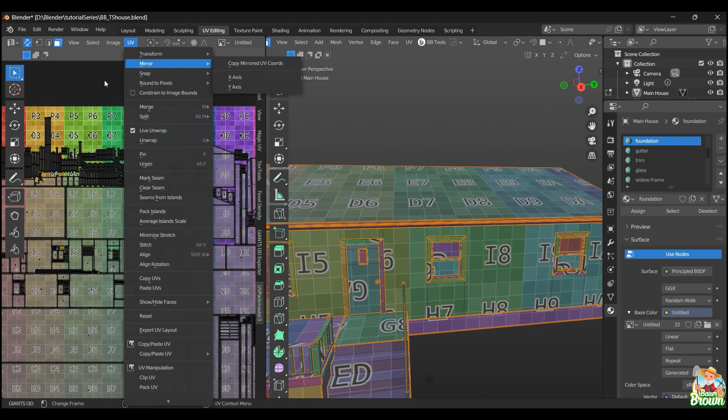It comes in really handy depending on what you're working on. On my current model, the frame has some windows that are circular, more of an oval shape, but it looks a little weird inside my UV space, the way it's unwrapping and taking up room. So I was working on straightening them, and it works well. I just can't remember off the top of my head how I was straightening UVs, but if that's something you're interested in, definitely Google it, look it up, and practice with it. Take something a little out of whack and practice straightening it.

What I'll do in the meantime is - I always feel bad when I bring something up and then can't remember how to do it. That's not really part of the process here, but it does come in handy in case you ever need it. What I'll do is look it up, and maybe in a future video we'll go over how to straighten UVs, because it's something worth knowing. It really is, I just wanted to throw that out there.

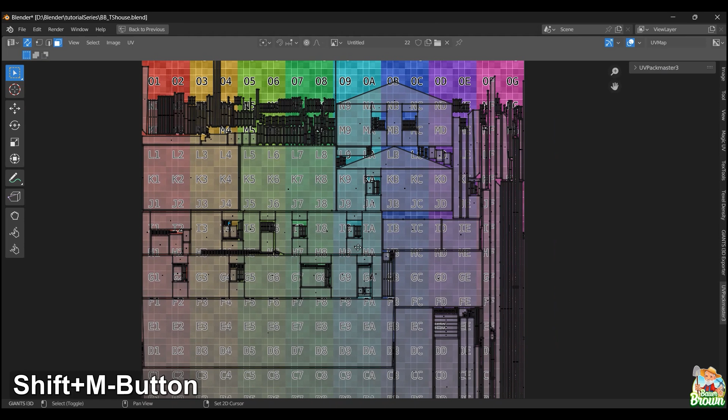So now that these guys are all packed up, everything looks pretty nice. It's going to pay to double check your mesh once again, just to make sure you didn't miss anything, any seams that need to be marked, or any UVs that haven't been rotated. Give everything a quick once-over just to make sure we're good, and we'll be moving on to the next step.

Unfortunately, we're not going to be moving on to that step in this video - that's probably going to be the next video. So the next step, for this particular workflow, is going to be getting into vertex coloring.

I'll quickly explain what that is - each one of these materials, we're going to give its own color: red, green, blue. I use TexTools for that, so I have this thing called Color ID. This is why I mentioned earlier - I'm recording this on different days so I'm not sure what I mentioned previously - TexTools is only capable of going up to 20 vertex colors. That's why I try to keep my materials at 20 or lower. I believe I'm up to 22 in this, so I'm going to have to give it a couple extra colors, which is fine. Not a big deal, but you're also not locked into that 20 colors.

You can have an infinite number of vertex colors, so you're not locked in. This add-on here just makes it super easy to get the coloring done, and that's why I stick with it.

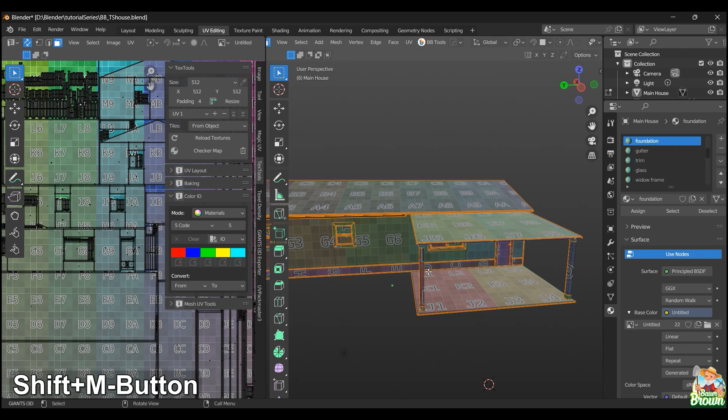There's a bit of a different process for vertex colors, and I'm just not good at it. I never really researched it or played with it enough to get good at it, which is something I probably should do. Vertex coloring was never really my thing. Once I discovered this add-on and realized how easy it was, that was it. So I have some learning to do myself, it's not just you guys. There are definitely things I need to brush up on, and vertex coloring is one of those things.

You want to look into TexTools as well. I'll try to provide links to any of these add-ons in the description so you guys can find these tools. TexTools, I believe, is free, I don't think it's a paid add-on. I don't think you'll find it on the Blender Marketplace though, I think it might be on GitHub possibly.

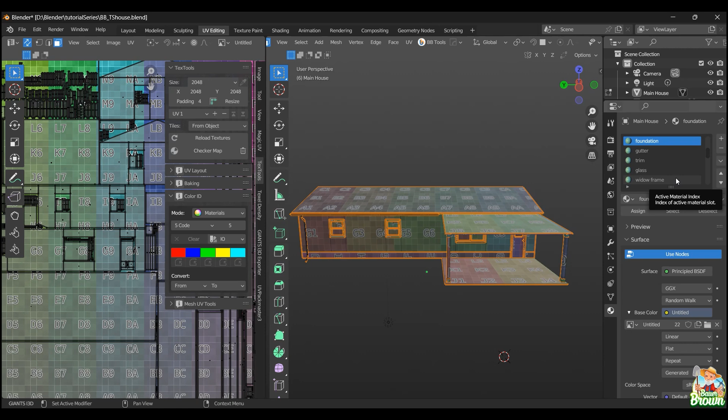Once we get the colors put on here, that's going to be it. I'm going to go through and delete the materials, and we can move everything over into Substance Painter and start painting our house.

Now you'll notice we do have two steps missing here, and that is our occluder mesh and our LODs. Those are missing, and I tend to make those afterwards, once everything else is done.

I've mentioned this before too, that I'm not a professional by any stretch of the imagination at Blender. So things that I'm doing, maybe they're not the optimal way. It's not the best way to do it, but it's not the worst way either, it's just my way of doing it. I'm sure there are professionals out there that have a much more optimized, efficient way of doing things. And they're pros, that's what makes them pros.

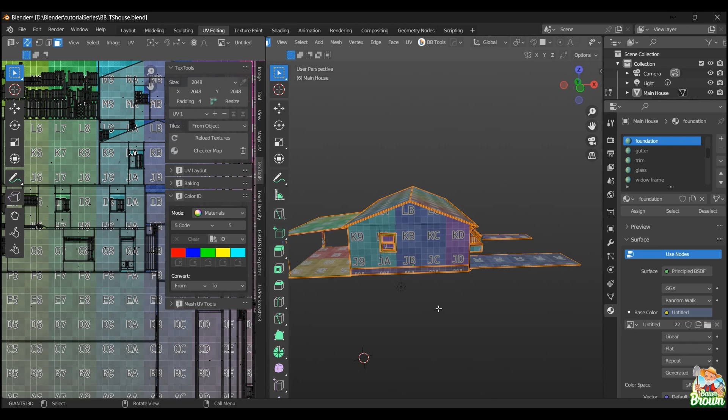I managed to get the job done. Now, I did question when I do the LODs, since they need to be textured as well, whether there's a better way I could be doing them other than my current way. I'm going to look into that and see if I can refine that method a little bit better, because right now the way I'm doing them probably isn't the most ideal way. The one thing I can't stand is passing along bad information to you guys, so I'll try to look into it and come up with a better way to texture my LODs.

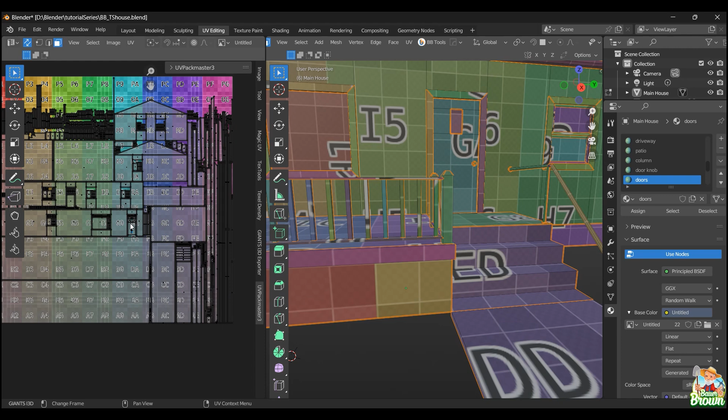I just noticed my door there is upside down. The nice thing with some of these, like that door, since it's not square but rectangular, I can actually spin it without having to repack my mesh. But generally, if you make any changes to your UV space, you do want to repack everything ideally. It doesn't hurt anything to go in here and just repack it, so that's probably something I should be doing anyhow, because you never really know what changed.

See this piece here, it's a good thing I did this, because this piece, which I'm not sure what that is, ended up in the middle of the door there, and that's not where I wanted it. So repacking it, no big deal. Any changes that you make, adding a seam, rotating a face, something like that, make sure you're repacking the mesh.

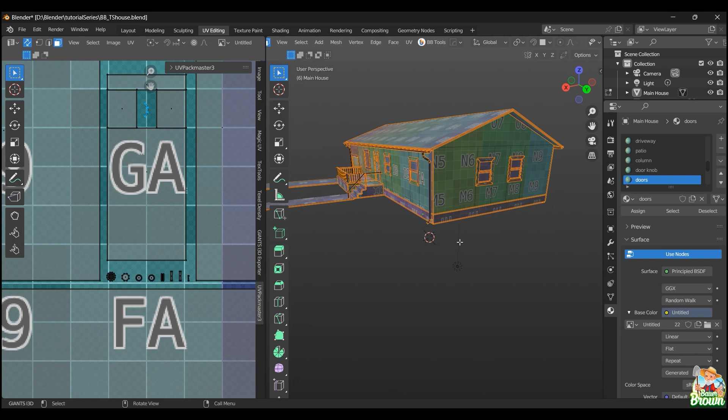That's it, I'm going to cut this video off right where it's at. Look forward to vertex painting in the next video, and we'll get everything exported out to Substance Painter or Instamat, whatever you happen to be using.